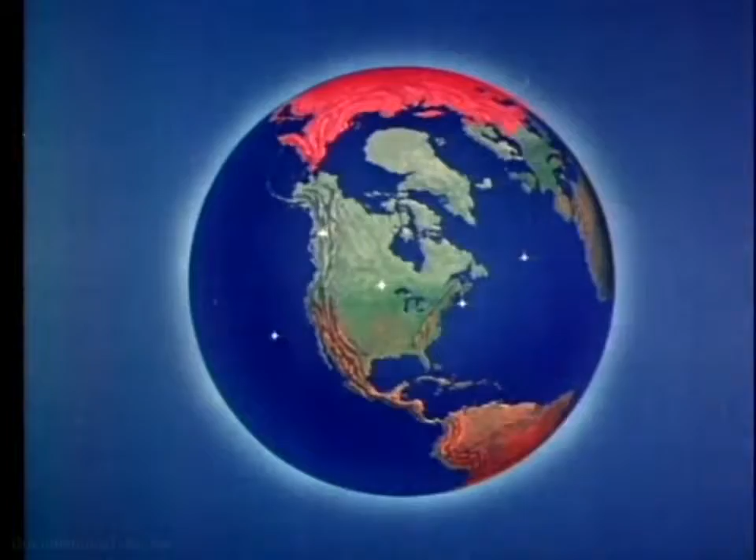Sprawled across North America, from the polar ice cap to the Mexican border, is a giant with 1,000 eyes. Day and night, fair weather or foul, he guards his homeland. This giant is the air defense system of North America, a vast and intricate maze of radar networks. And through the electronic eyes of this giant, we are able to see the enemy before the enemy sees us.

These radars never sleep. Round the clock, they stand ready to do their part in minimizing the penetration of enemy bombers. And round the clock, their quietly pulsing hearts, the magnetrons and the klystrons, help generate the power for peace that keeps America strong.

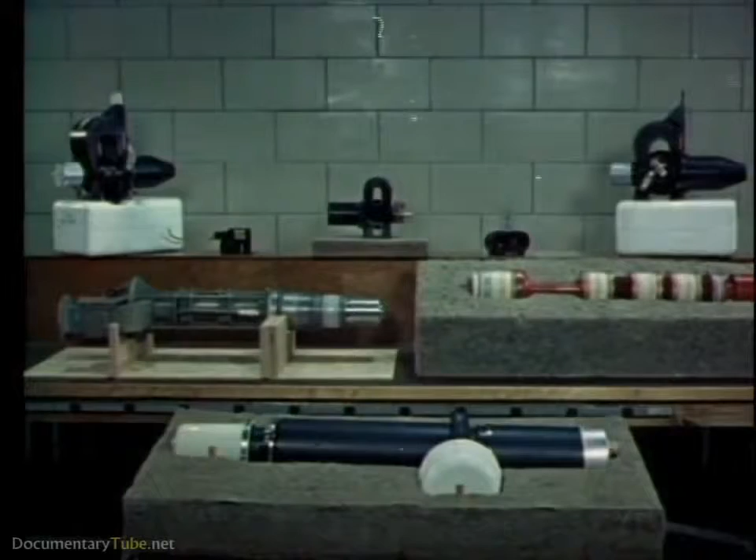These microwave power tubes, the magnetron to generate the radar signal, the klystron amplifier for radio communication, and radar are the subject of our story.

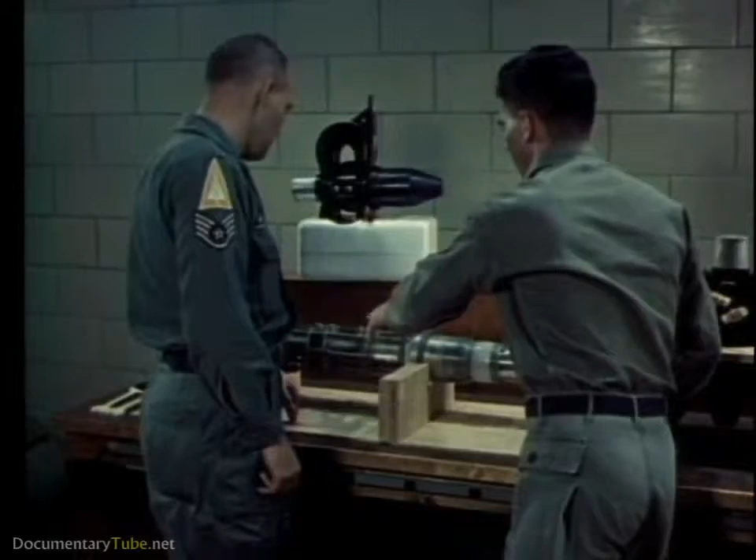It is a story about these vital tubes, but even more about you, the men who work with them. When you have a well-trained maintenance man with a well-adjusted radar at a well-chosen site, then you've really got a winning team.

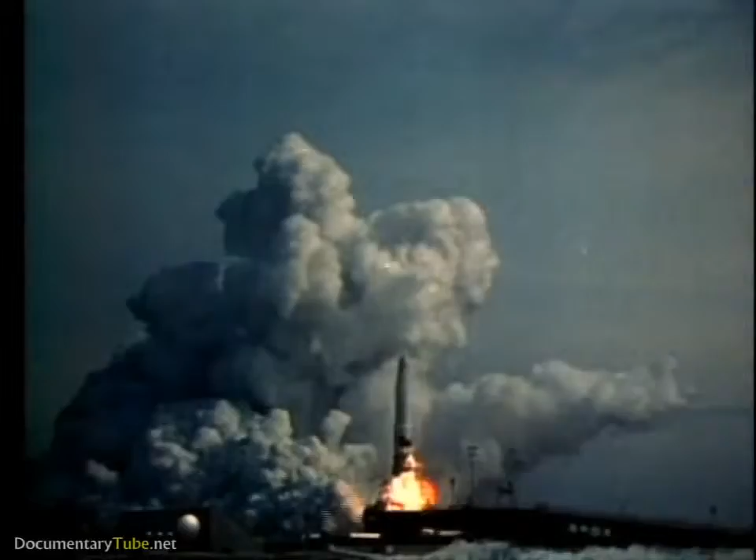They keep the airborne radars operating and ready for crucial missions. In missiles that depend upon radar for guidance. In bombers that depend upon radar for bombing and navigation. In interceptors that depend upon radar for fire control. And in reconnaissance and search aircraft that depend upon radar to extend their vision.

Years of scientific research and millions of dollars worth of equipment have gone into this aircraft. But only if the maintenance men keep the radar functioning can it complete its mission. When something goes wrong, they've got to make a quick decision, whether to attempt repairs in flight or abort the mission.

There's trouble here, that's for sure. But what kind of trouble? First, they check the radar scope presentation. Sometimes this gives a clue. But the most reliable analysis comes from the test equipment on the monitor panel.

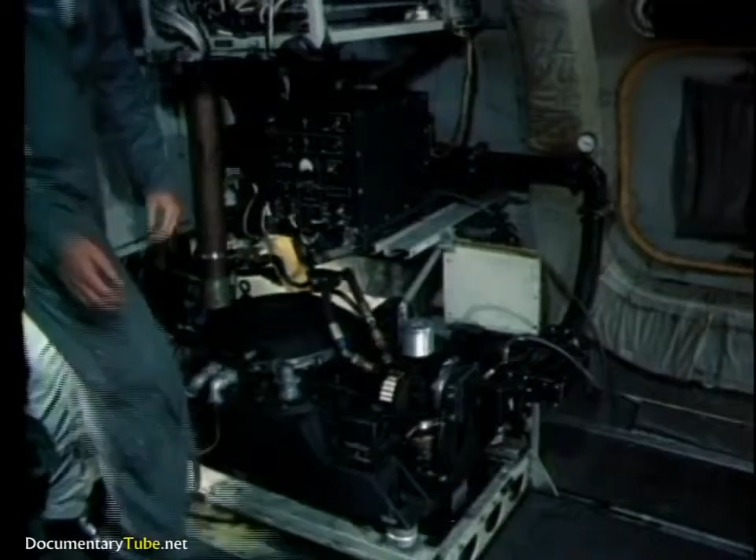The cause might be moisture in the waveguide, corrosion, dents, or scratches. Another trouble spot could be the pressurized antenna system. Loss of waveguide pressure will also cause arcing. Yes, the pressure's low. This is a danger signal. If this arcing continues, the magnetron output window may be damaged, the tube's vacuum lost, and the magnetron destroyed.

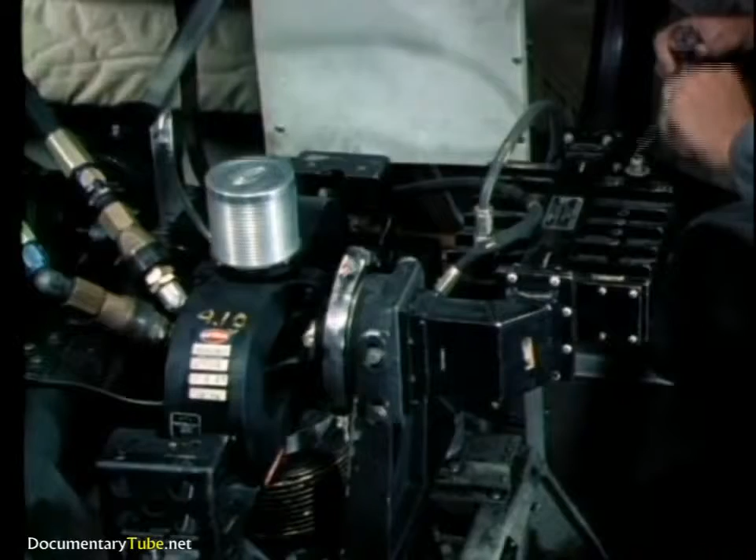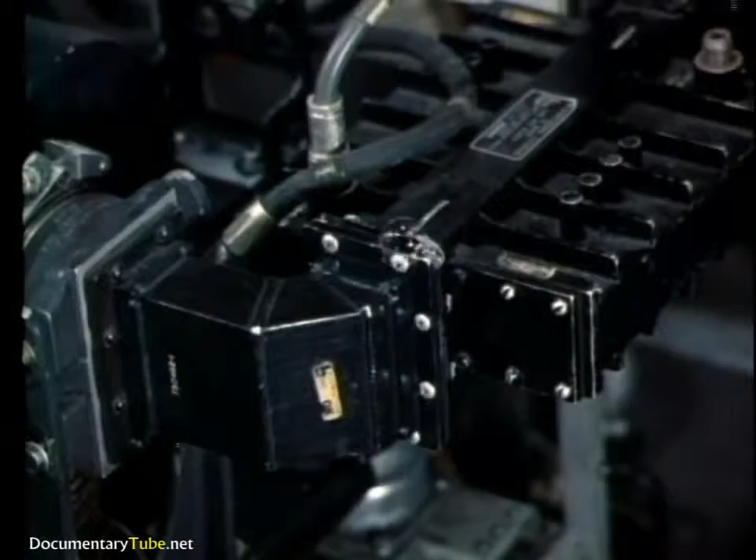Waveguide joints should be tested to make sure they're airtight. This man is making a liquid soap test. See where the bubbles are forming? He's found the trouble. But how serious is it?

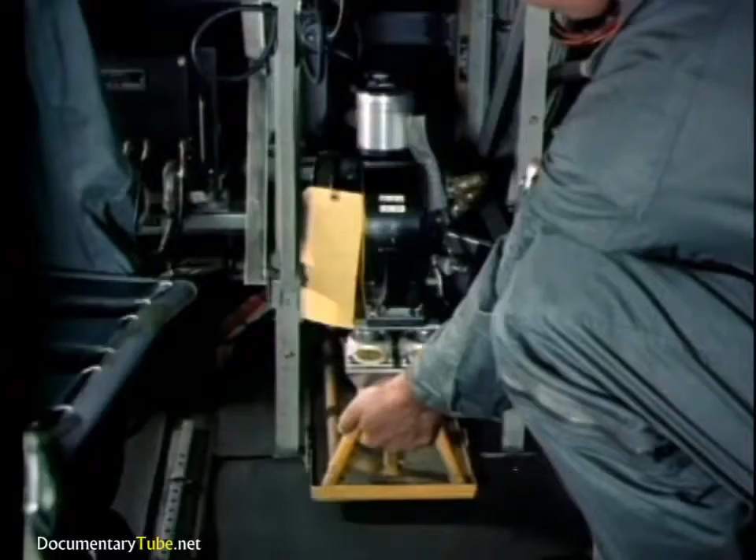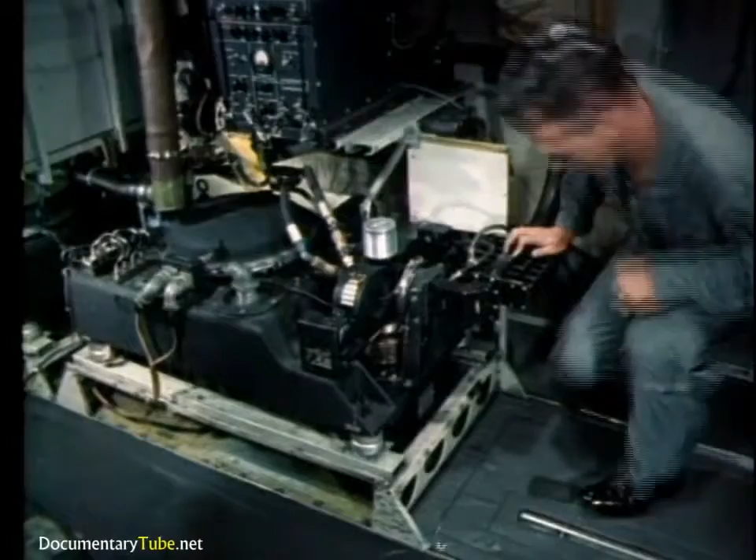While they're working, let's take a look inside the magnetron. Animation shows what caused the malfunction. We'll turn time back a few hours and show the Maggie functioning normally.

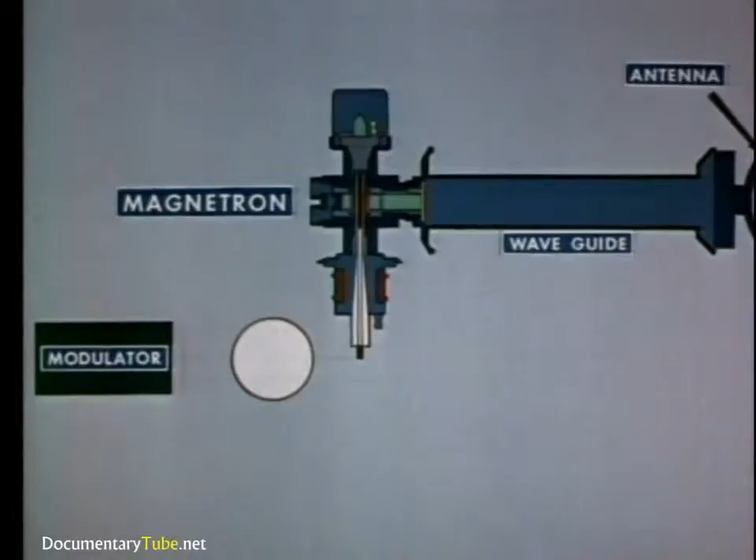As the pulse from the modulator is applied, the Maggie produces radio frequency oscillations to form the radar pulse. This energy is then coupled into the waveguide and directed to the antenna for transmission. Energy is reflected back along the waveguide toward the magnetron.

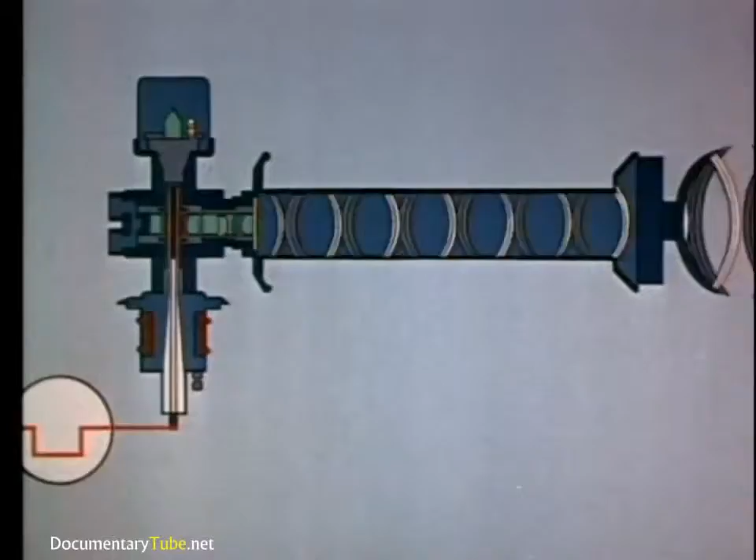Normally, when the antenna system is in good shape, the reflected wave won't be strong enough to cause arcing at critical points. But as conditions such as loss of waveguide pressure develop, the antenna characteristics change and the reflected wave becomes greater.

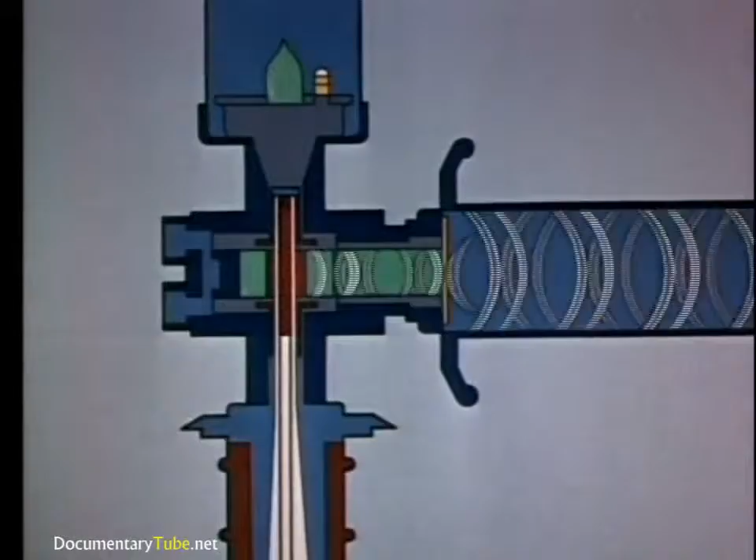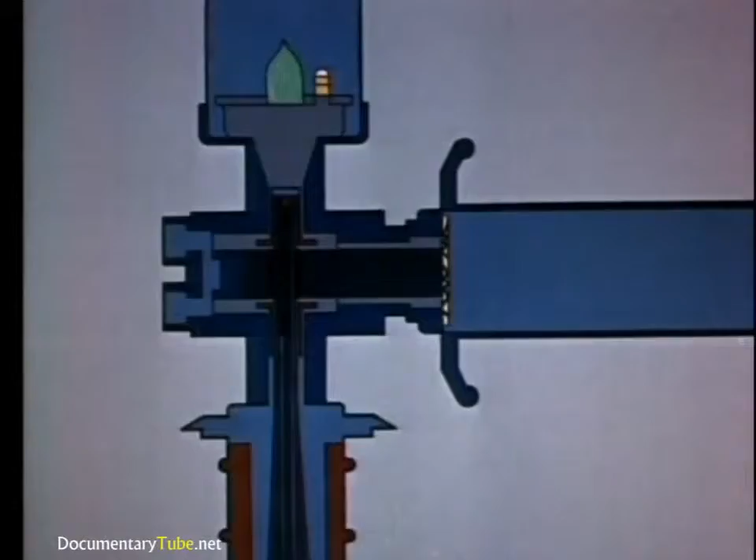Then arcing may take place at the point where the radar wave leaves the magnetron, causing the magnetron output window to crack or puncture. As the vacuum is lost, the heater oxidizes and burns out. The cathode cools. Air seeps into the interaction space, and arcing occurs with each pulse.

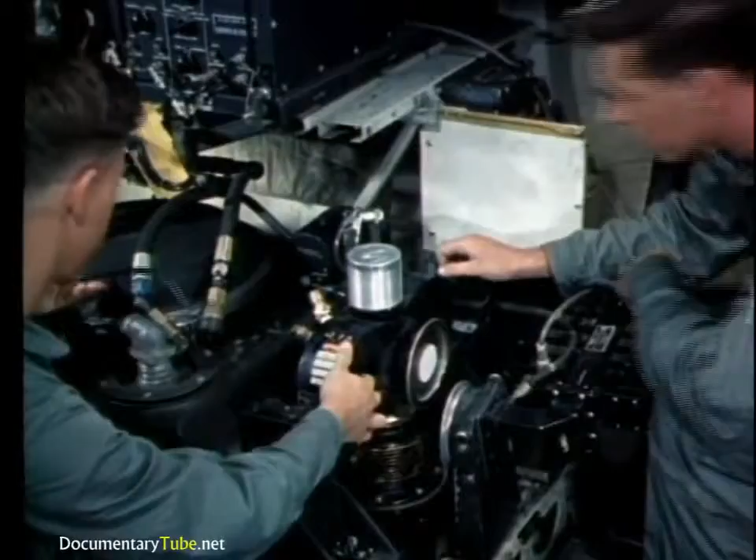After the magnetron has been unbolted, the filament and cathode connections are uncoupled. A large magnetron like this one requires 2 men to handle it safely.

Before a Maggie is replaced, all connections, mating flanges, and sealing surfaces should be inspected. Insulating oil should be examined for foreign matter. Damaged or worn gaskets should be replaced.

Heater's supply voltage should be established at the value marked on the tube. Later, when the plane returns to base, the heater voltage should be double-checked with an accurate instrument.

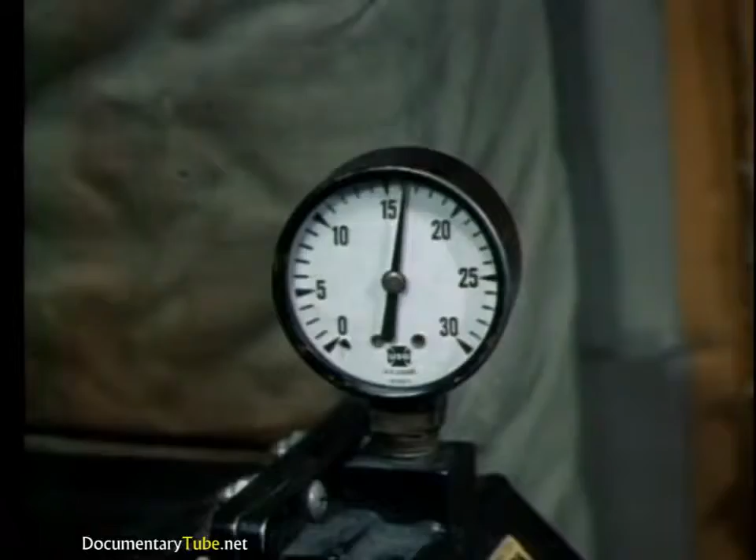Now that the spare magnetron has been installed, further tests are necessary. The technician must make sure he has the required pressure and that there are no air leaks. Instructions concerning the care of pressurized antenna systems will be found in the appropriate tech order handbook.

The liquid soap method is a simple way to check for pressure leaks and may be used where more accurate means of testing are not available. Test equipment is used to analyze the performance of a newly installed tube.

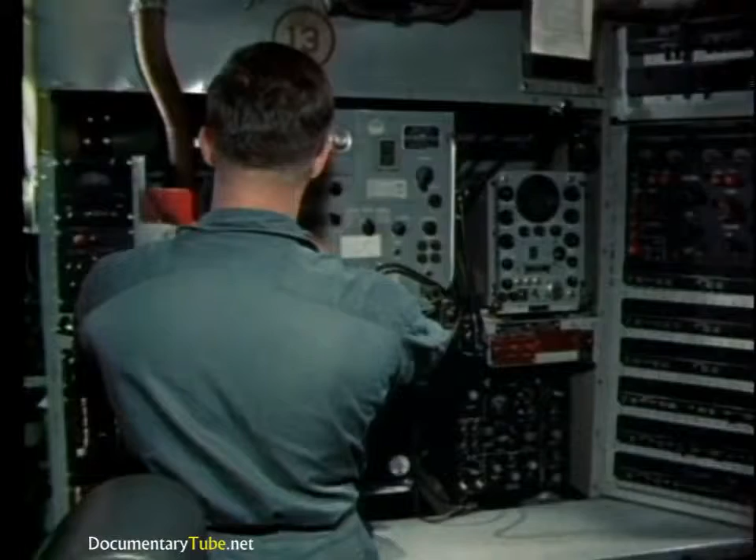The output pulse is checked on the spectrum analyzer. See how the large hump or main bang is symmetrical and sharply defined. The side lobes are relatively small. A presentation like this means that the Maggie is firing properly.

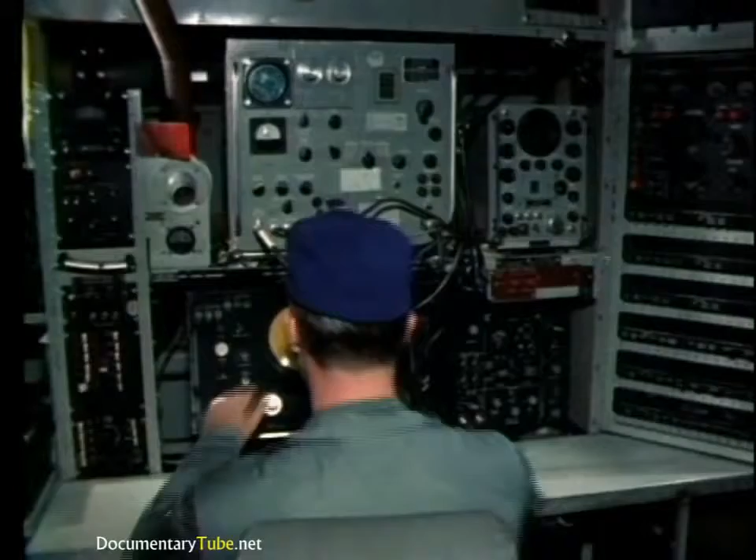Not only that, it means that these technicians know their jobs. They were able to analyze the trouble correctly and replace the magnetron in flight. Because they knew what to do, this aircraft was able to complete its mission.

Let's take a closer look at these microwave power tubes. Magnetrons costing from $100 to $10,000.

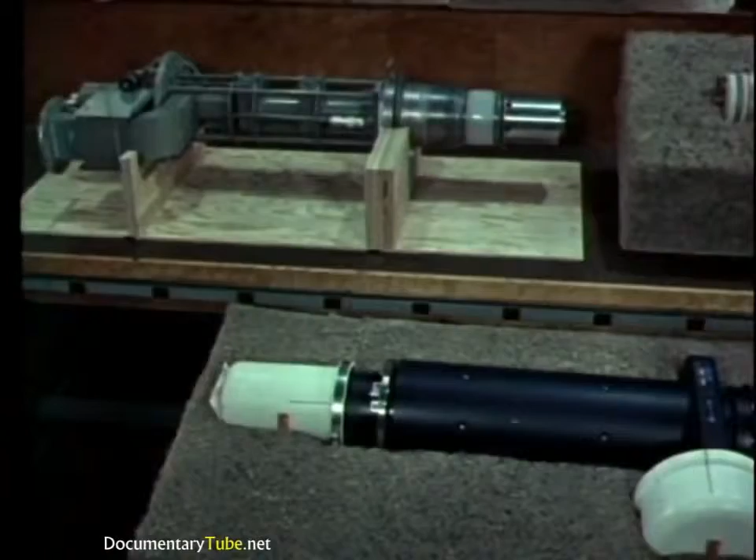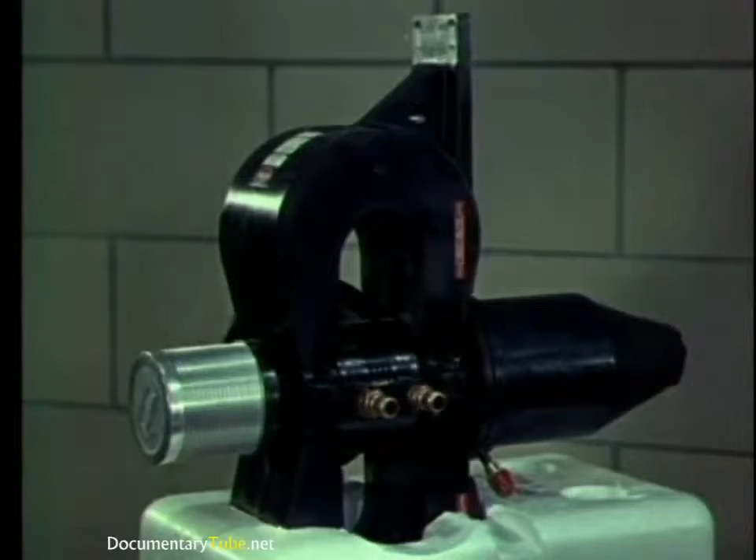Klystrons costing from $1,500 to $25,000. Why so expensive? Let's see what's inside them. Look at this. Parts so critical, they must be inspected through a microscope.

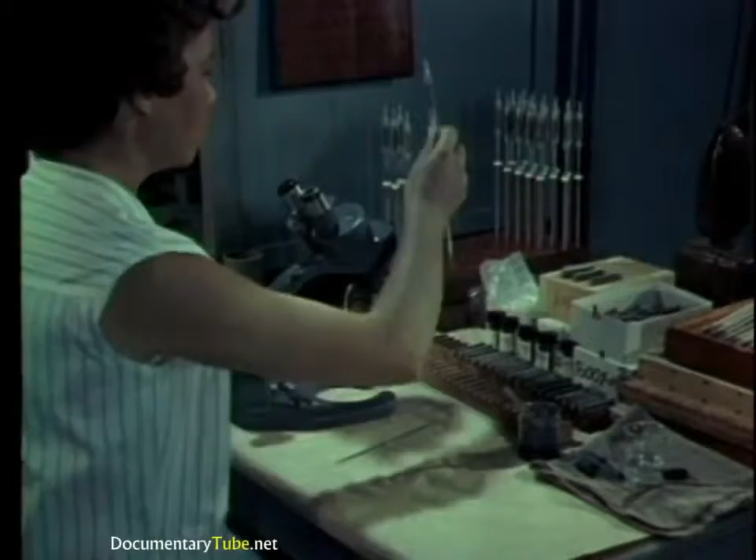Tolerances accurate to 4/1000ths of an inch. To build them to such close tolerances requires involved manufacturing processes. Specialized parts must be carefully assembled.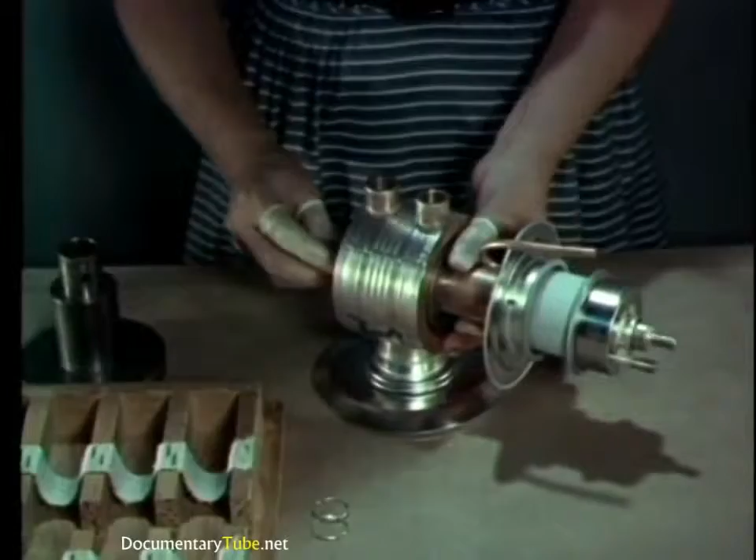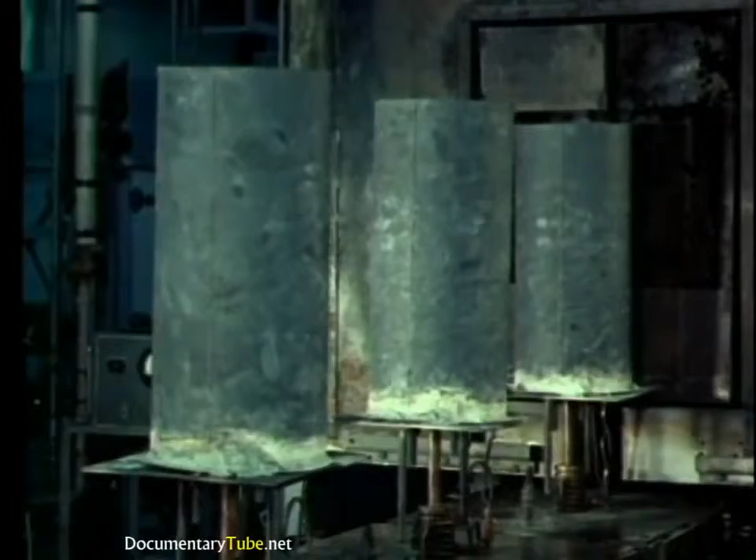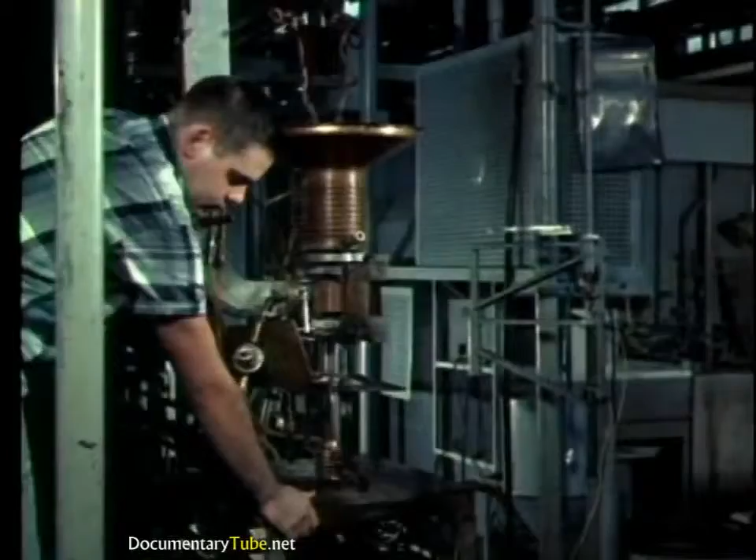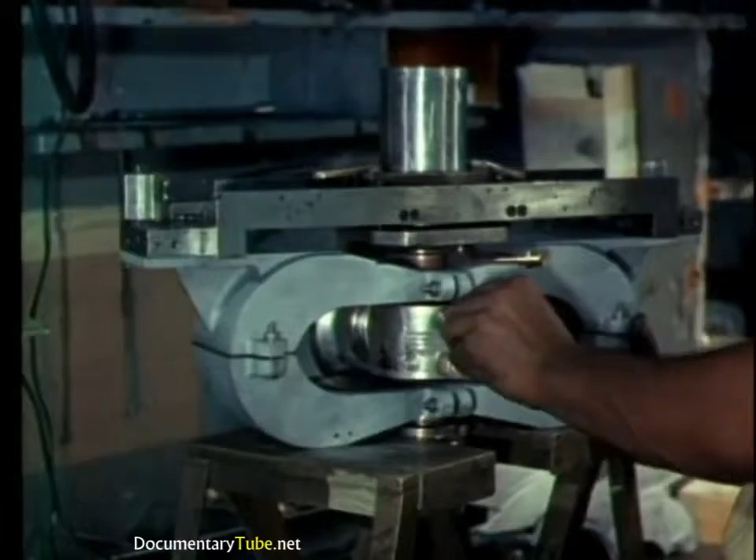The completed assembly is heat treated to bake out gas molecules, so that they may be removed by an evacuation machine. External mechanical parts, such as couplings and magnets, are installed. The final step is rigid testing of electrical performance to make sure it meets the high standards required.

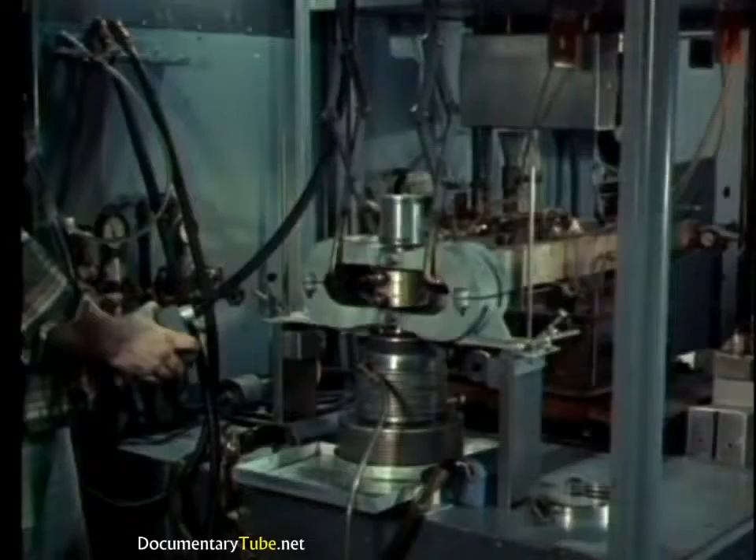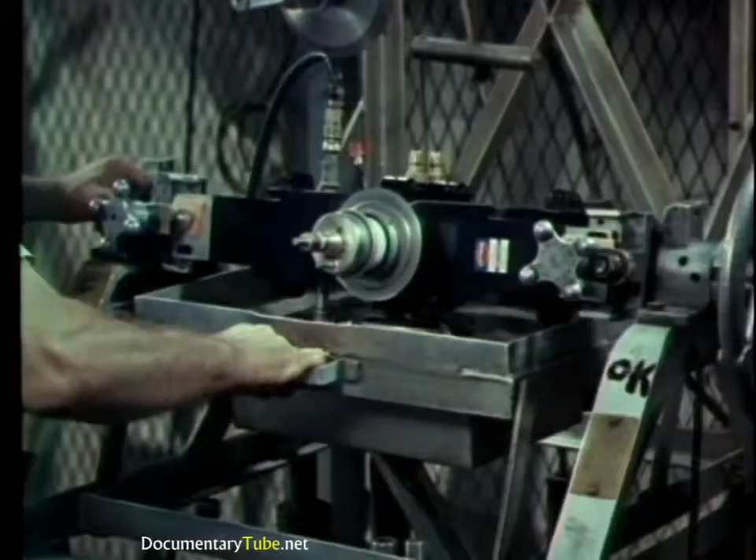Pressure tests ensure leak-proof connections throughout. Now the tubes can be put into storage. Even here, should tiny defects develop while on the shelf, continuous sample testing will reveal them. Before shipment, the delicate tubes are carefully packaged. The quality designed in during research, built in during manufacture, maintained by rigid testing and careful storage, will reach the user intact.

Here are a few basic rules on proper handling. Always use 2 men to lift a heavy tube. A portion of a carton makes a good tube stand, protecting delicate parts from damage.

But a wooden rack is better and lasts longer. Save all the cartons and packaging materials. Use them to return defective tubes to the factory.

Magnetrons should be separated at least 12 inches. Then their magnetic fields won't interact. Don't store them on steel shelves or they may be degaussed.

Don't use steel tools. Use non-magnetic tools. Following these simple rules will save time and trouble, prevent damage, and save the Air Force many thousands of dollars each year.

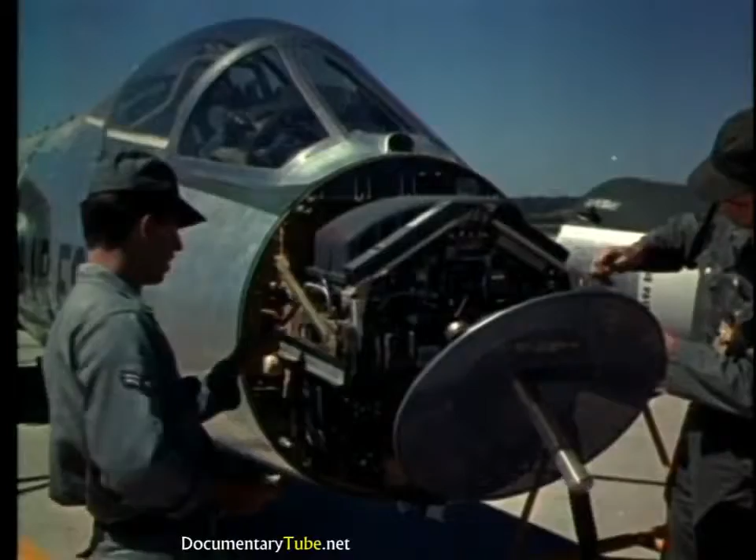On most of the smaller high-performance aircraft like this one, it is not possible to do in-flight radar maintenance. Therefore, most of the work must be done in the electronics maintenance shop. This aircraft has just aborted an intercept training mission. The reason: radar malfunction. Had this mission been the real thing, an enemy bomber could have broken through our defenses.

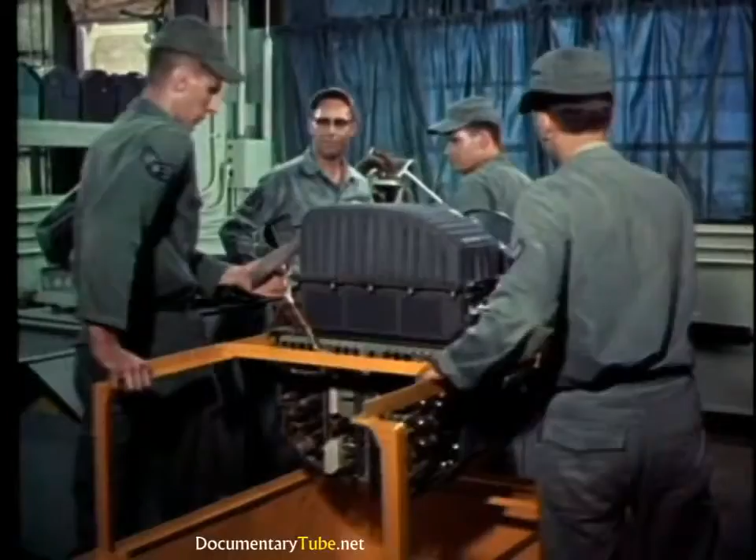The maintenance man's job is to find out why the radar malfunctioned and correct the trouble. You'll see that although these radars come in smaller packages than those on larger aircraft, they are just as big a maintenance problem. The maintenance supervisor is in charge of this work.

Before teardown of a defective black box is started, the operational defect should be identified or at least isolated to a particular subchassis. The pilot's report on the radar failure may give a clue. Comparing the report of malfunction with equipment handbooks may also help to isolate the defect. But the best aids to repair are the analytical approach of the technician and the special test equipment he uses.

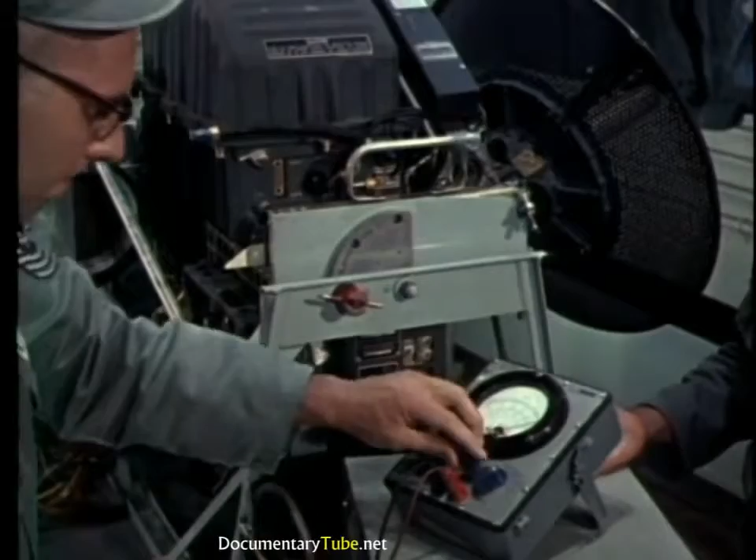An important point to remember is that the transmitter malfunction may be caused by parts other than the magnetron. Wherever possible, other circuit components should be checked before power is applied. A simple resistance check will often reveal a short circuit.

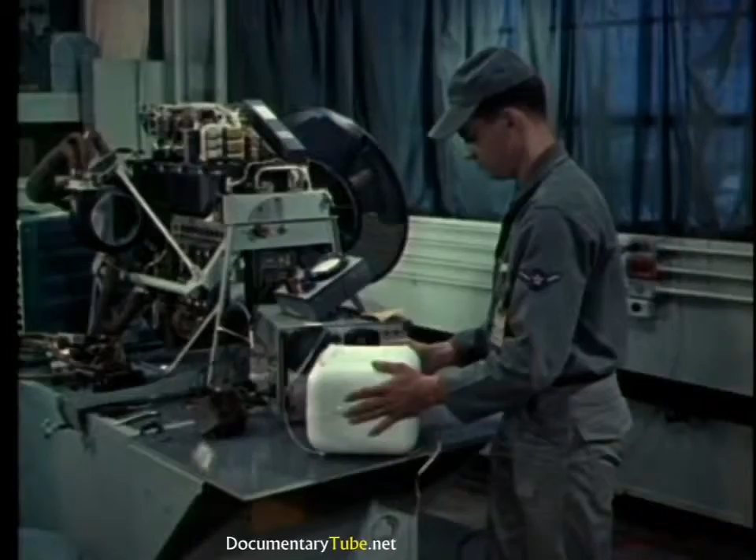That's what the trouble is here. The airman will carry on from here and trace the short circuit. So far, so good. He's found a shorted filament transformer and replaced it with a new one. But what's this? He's decided to change the magnetron, too.

The supervisor disagrees. Tube swapping is not a good idea. The old magnetron should be thoroughly tested before any decision is made. Testing showed that the old magnetron should be replaced. This has been done. Now let's see how the new Maggie behaves.

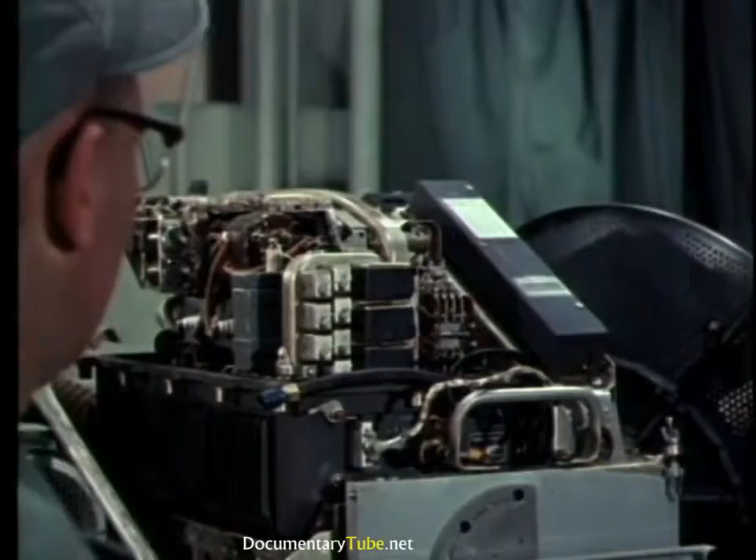This is confusing. The spectrum analyzer shows arcing. Let's look inside the tube and see what's causing it.

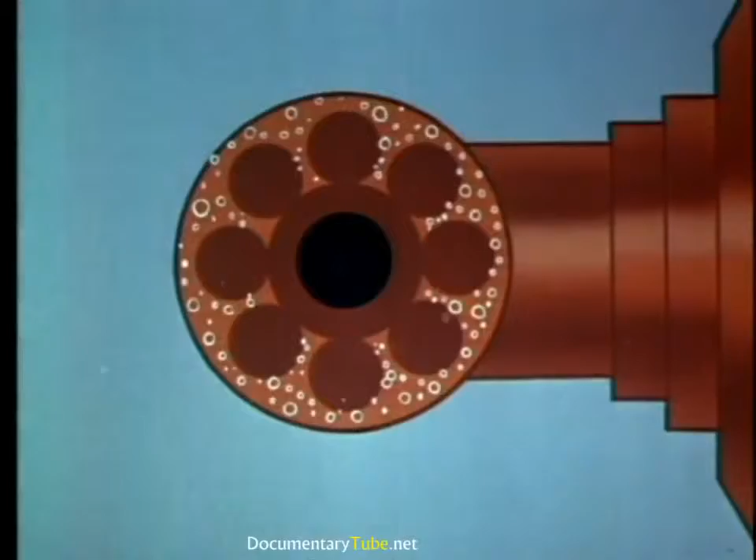Magnetrons are made of porous metals, which usually trap a small amount of residual gas. During storage, gas molecules migrate into the interaction space surrounding the cathode. When the tube is installed and power applied, it will operate normally if the gas content is low. But if gas content is high, arcing will occur with each modulator pulse.

This arcing might be mild or severe. Frequently, tubes with residual gas can be restored to normal operation by a suitable break-in or seasoning period. During break-in, the gas molecules are driven back into the walls of the tube, and normal operation resumes. If the equipment is operated frequently, normal operation should continue throughout the life of the tube.

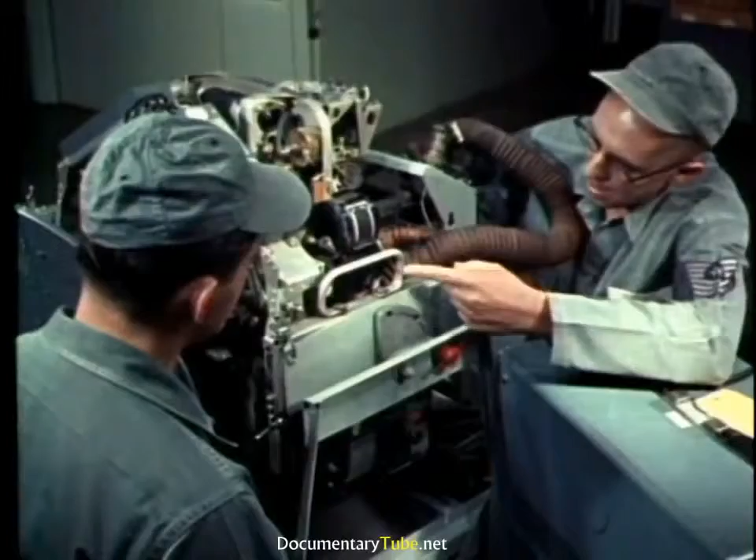Occasional individual arcs may also be noted in a normal tube which does not contain gas, but this behavior is due to transient conditions and should be considered as normal. All new tubes which display arcing when they are first installed should be thoroughly tested and analyzed before being discarded. This will save the government both time and money.

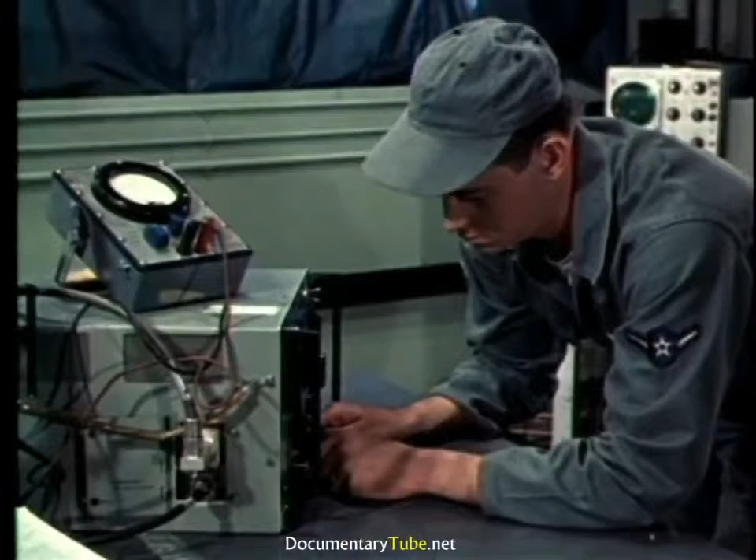The repairs are finished. Now comes the break-in procedure. Proper break-in can clear up various degrees of internal arcing. But watch the spectrum analyzer carefully. If frequent arcs occur, switch to standby immediately.

Small magnetrons may be damaged if severe arcing is allowed to continue more than 2 seconds. Now the range selector switch must be changed to short pulse before the magnetron is operated.

If only sporadic arcing occurs, operation may be continued. But a series of arcs may cause the overload to pop. In this case, reset the switch and continue the break-in.

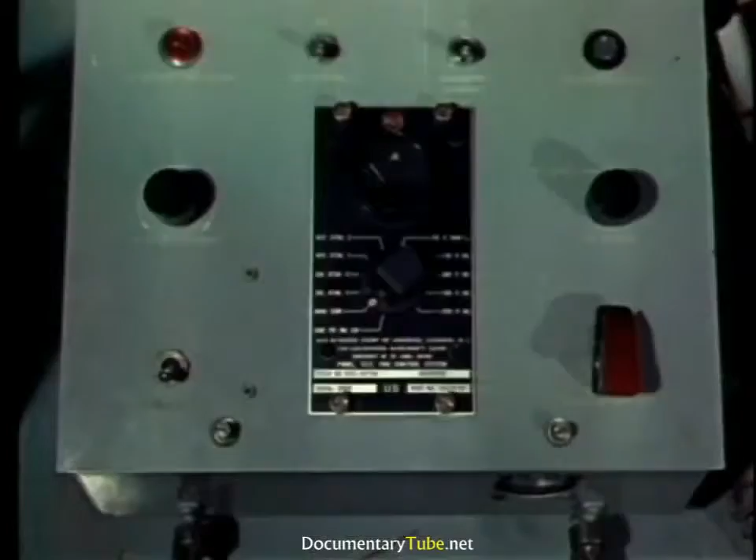To avoid possible damage during the break-in, the technician should keep a close watch on modulator tubes and other components of the RT unit. The time required for break-in will vary with the tube, conditions, and methods used, but normally break-in can be accomplished in 20 to 60 minutes. When break-in is complete, and only infrequent arcs or misfirings occur, operation may be regarded as normal, and the equipment made ready for service.

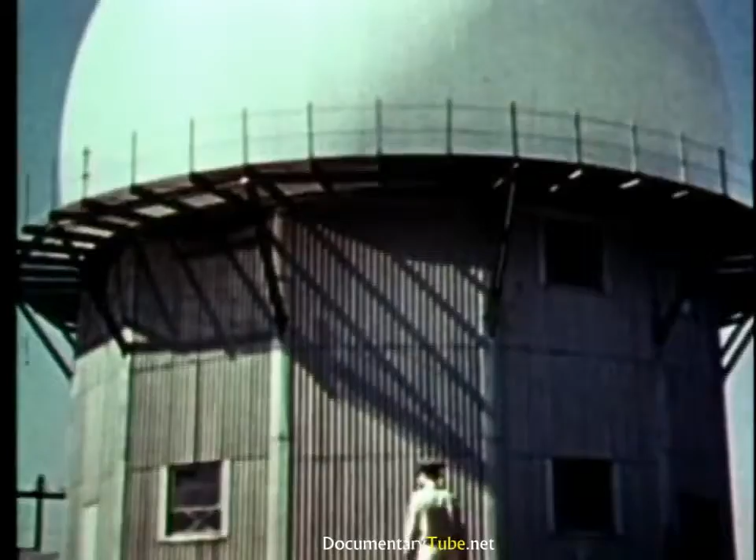In addition to the airborne radars, there are a great many ground radar sites scattered about the continental United States and Canada. They are found in almost every type of American scene: in the dusty expanse of the plains, in the Northwoods, the heat and humidity of the deep South, in the rolling farmlands of the Midwest, and the salt water scenes of our coastal areas.

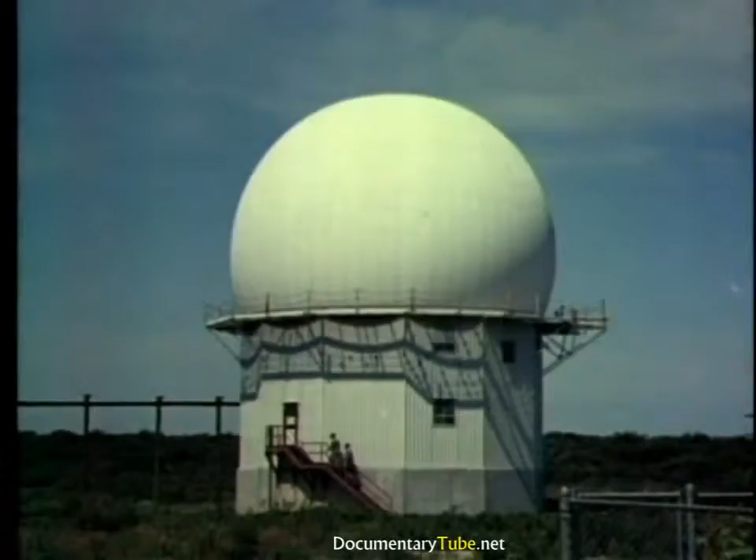Each of these has its own problems of maintaining and efficiently operating its microwave power tubes on a round-the-clock basis. Some of this equipment is completely automatic, but experienced technicians are always nearby, just in case. At the many radar sites where there is no standby equipment, the maintenance man is an even more vital unit in the organization.

In the operations room, observers keep constant watch on the radar scopes. Here's trouble developing.

When equipment starts to malfunction, quick repair is a must. These men are so used to the sound of the equipment, they can tell by listening whether the magnetron is operating or not. It's not.

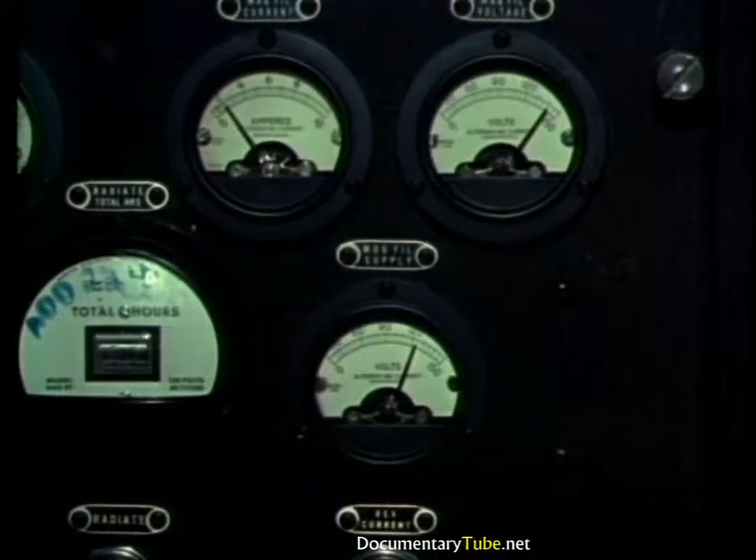Something caused this radar to quit. What was it? Sometimes the meters will tell the story. The filament current has dropped to 0, and the filament voltage is too high, indicating that a portion of the heater element is open. A quick, careful analysis has to be made.

Here is where maintenance skill and training pay off. The question is, has the magnetron become inoperative because of heater failure? Or is there another cause?

Yes, here's something. The insulator is pitted. High-powered magnetrons like this one have insulator bushings immersed in oil. It might be that the insulating oil has broken down. Better check this.

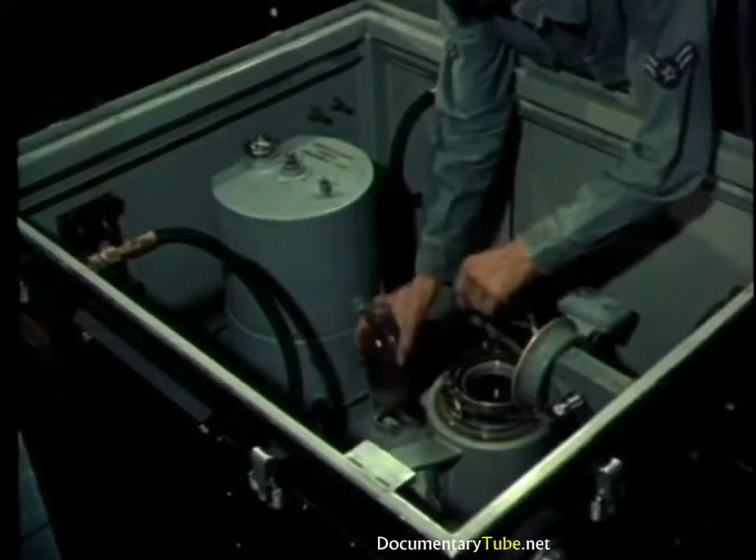Here's the answer. Contaminated oil. The oil failed to insulate. Oil can break down after long exposure to heat and high voltage. Oil may also be contaminated by dust, moisture, metal particles, or air bubbles.

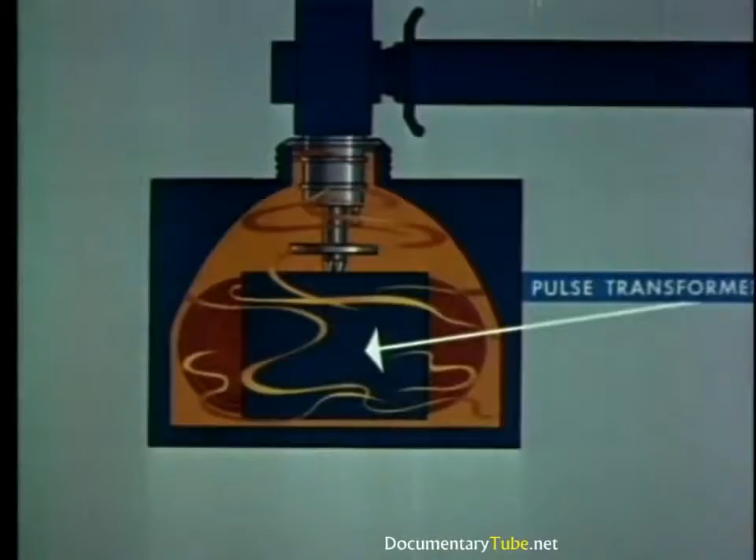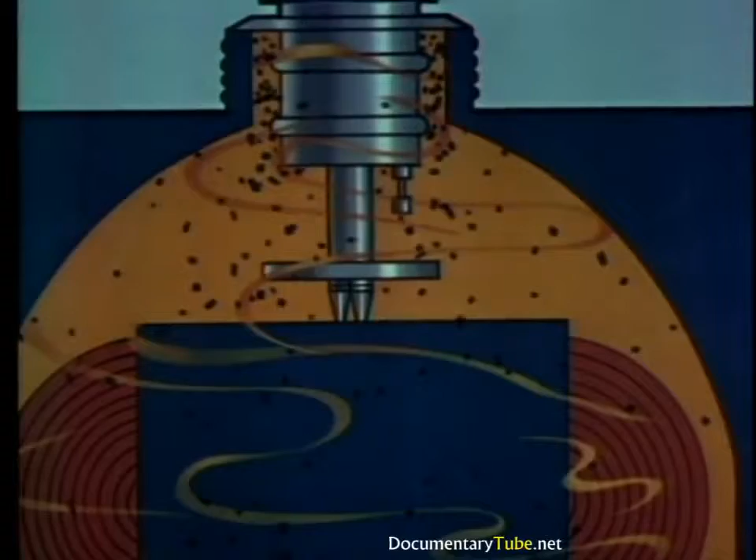Here is how contamination breaks down oil. As contamination accumulates in the oil, current paths are created between high voltage terminals and ground. As the condition becomes worse due to increase of contamination and change in oil structure, a definite high voltage path for corona discharge is created in the oil.

The corona discharge begins to erode the surfaces of the insulator. As the insulators are penetrated, the vacuum in the tube is destroyed, and the tube is damaged beyond recovery.

The maintenance men have completed oil replacement, using all precautions to prevent contamination. They have checked the grade of oil against tech orders and factory instructions.

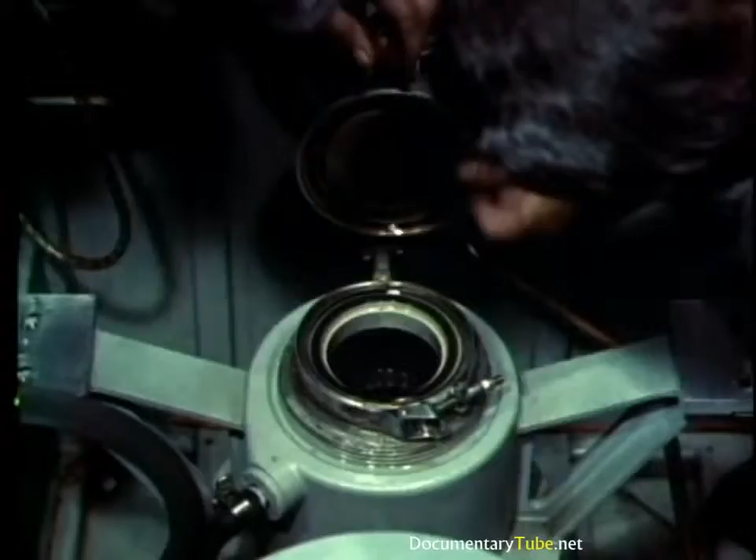But before installing the new Maggie, all mating surfaces and flanges must be inspected and cleaned or replaced as required. It is also necessary to check waveguide parts, replace gaskets, coolant hoses, oil fittings, and so forth.

Be sure all electrical connections are secure. Careful, watch out that terminal doesn't hit the cabinet. That could ruin the tube.

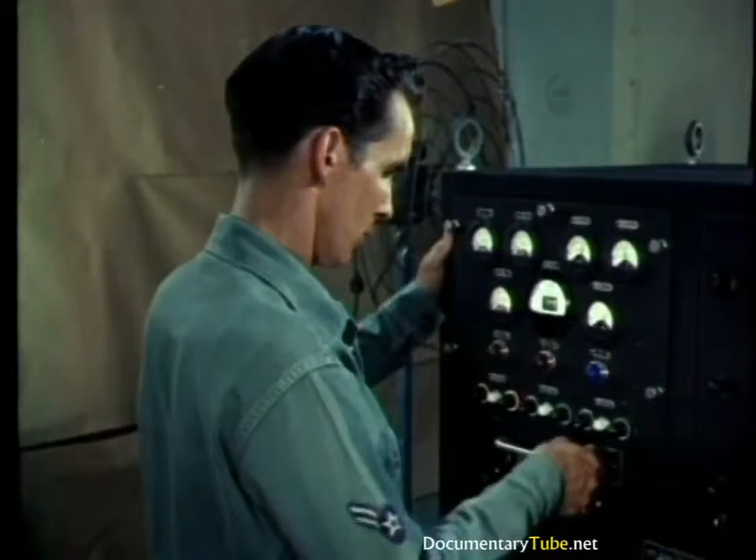Make certain that all clamps, bolts, coolant hoses, and so forth are secure before operating the tube. All set? Okay, hit the power button. Uh-oh, that one didn't last long.

There are many reasons why new tubes may fail to function properly. One of the primary causes of tube failure is damage sustained during transportation and handling. This damage may occur during shipping or in the depot, or during Air Force distribution to the base.

Here is what actually happened to that new tube which failed to operate. Nobody saw it happen.

Nobody's going to tell, and nobody's going to get the slightest use out of that magnetron. But these men don't know this Maggie fell off a truck. They just know it won't work.

Could it be something wrong with the rest of the equipment? A short circuit? A bad connection? Or should they pull out this Maggie and install another?

They've installed another new Maggie. They've also followed correct procedure, allowing the heater to warm up 5 minutes before applying power to the anode. Ah, it works.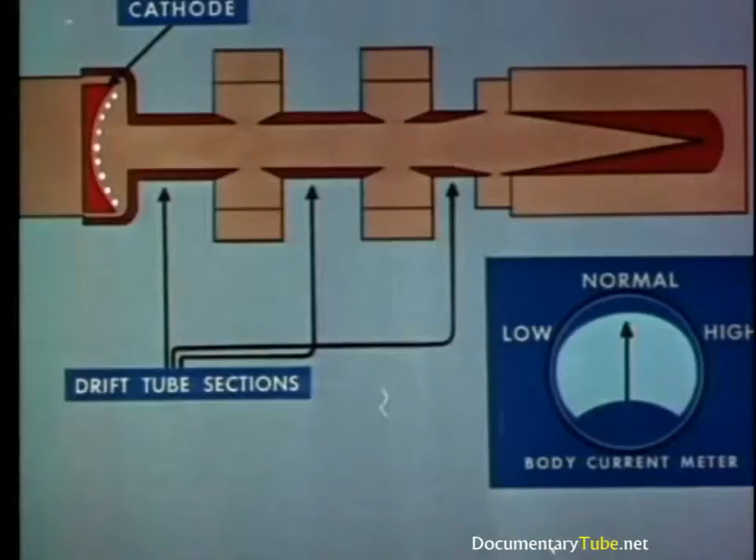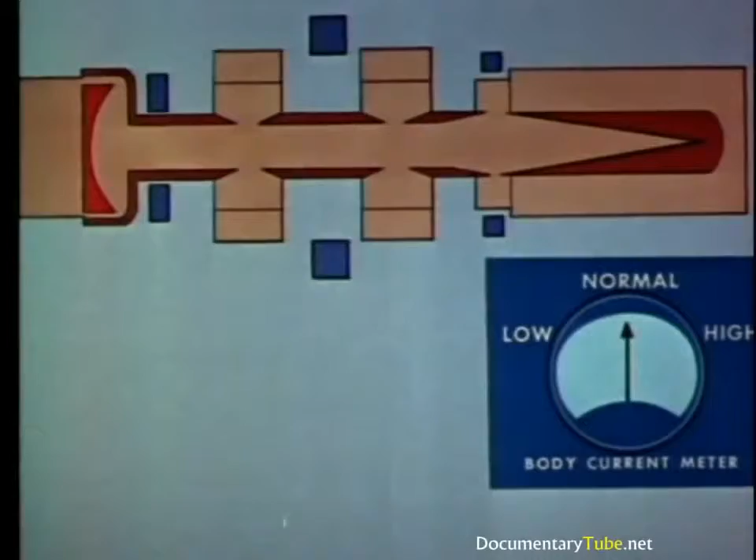Let's look inside a typical two-cavity power klystron and see how it operates. The beam current is emitted by a heated cathode and passes through the drift tube sections. Since electrons in the beam have like charges, they repel each other and tend to diverge, to be absorbed by the walls of the drift tube sections. But electromagnetic coils placed along the tube align them into straight paths. However, misalignment of the focus coils can seriously damage the drift tube tips. Therefore, it is most important to adjust the magnetic coil currents properly during installation of the tube.

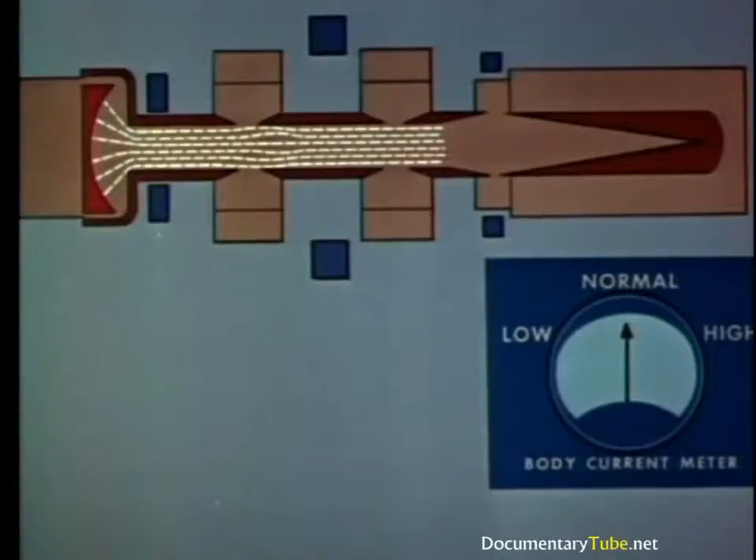When a steady, direct current is flowing through the tube, an RF signal from the RF driver stage is introduced into the first cavity resonator. As the cavity is tuned to resonance, a strong RF field appears between the drift tube tips, which form a gap in the resonator. The electrical charges on these tips alternate at the driver frequency rate on opposite sides of the gap.

At the same time, individual electrons in the beam are being accelerated or decelerated at the RF frequency rate. This produces bunching of the electrons as they approach the gap in the second resonator. There they are decelerated and release energy. The resonator converts this energy to RF energy and amplifies it. Additional resonators are sometimes provided for greater amplification. From the last resonator, the amplified RF signal is coupled into the waveguide and transmitted to the antenna.

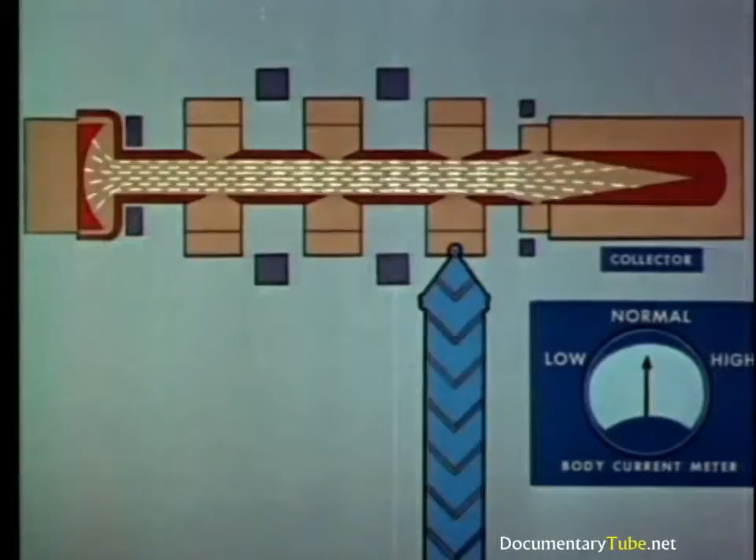Various kinds of klystrons are being phased into new Air Force applications, such as these tropospheric scatter communications transmitters. In this way, intelligence may be relayed from remote early warning sites to control centers many hundreds of miles away.

This transmitter has dual equipment. One transmitter operates while the other is on standby in case of emergency. The equipment is automatic. Meters and instruments keep a constant check on its operation, and a warning light flashes in case of trouble.

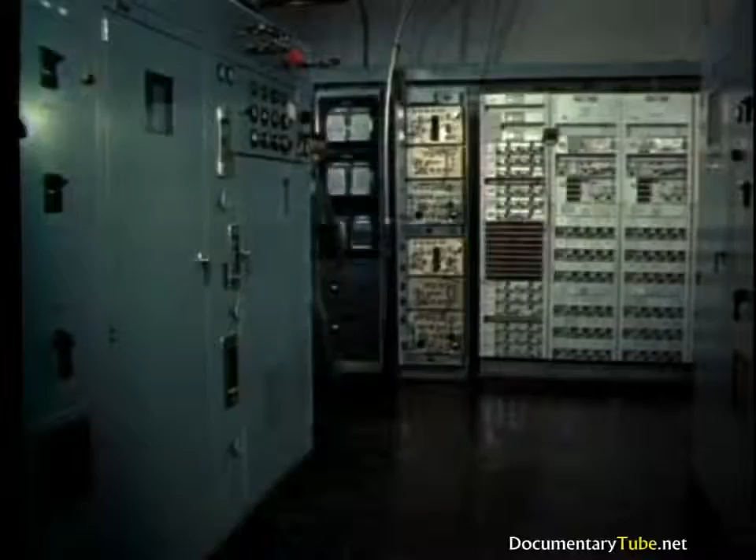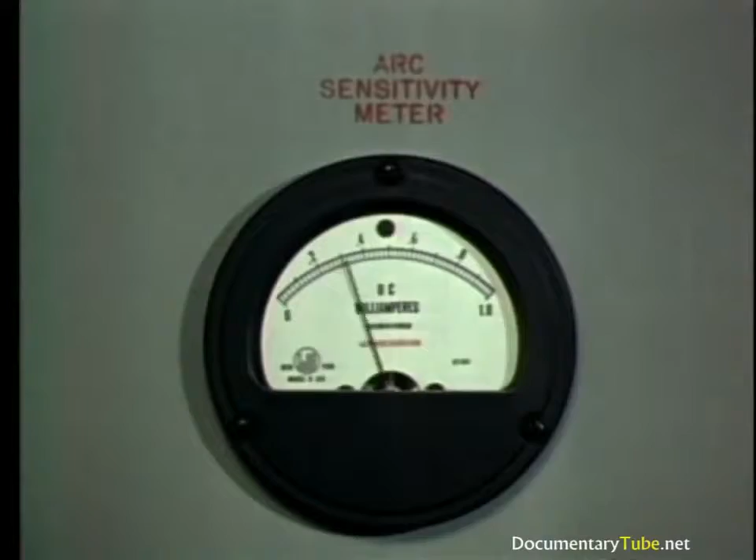And speaking of trouble, a glance at the meters tells them the trouble is in the transmitter output. The equipment is reoperated. Readjustment of the output cavity and coupler may correct the trouble, but the arcing continues. Since adjustment won't correct the trouble, all they can do is shut down the transmitter for repair and switch over to standby.

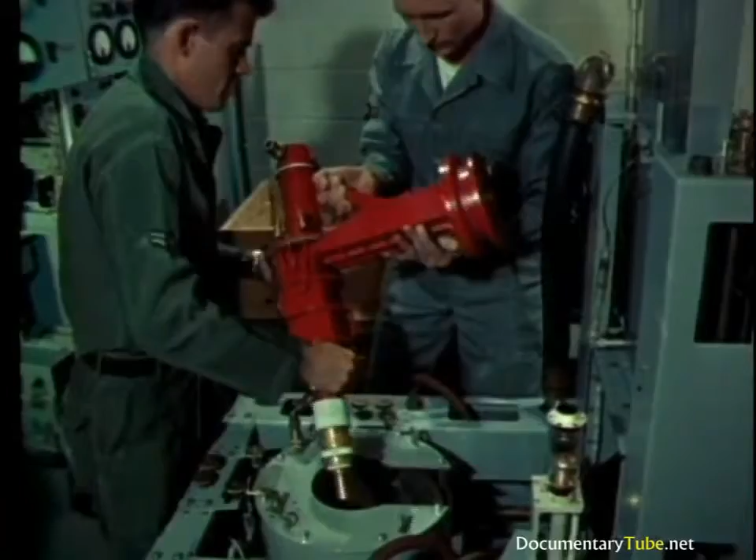The klystron has been removed for inspection. It may have been damaged by the arcing. Yes, the output ceramic is badly damaged.

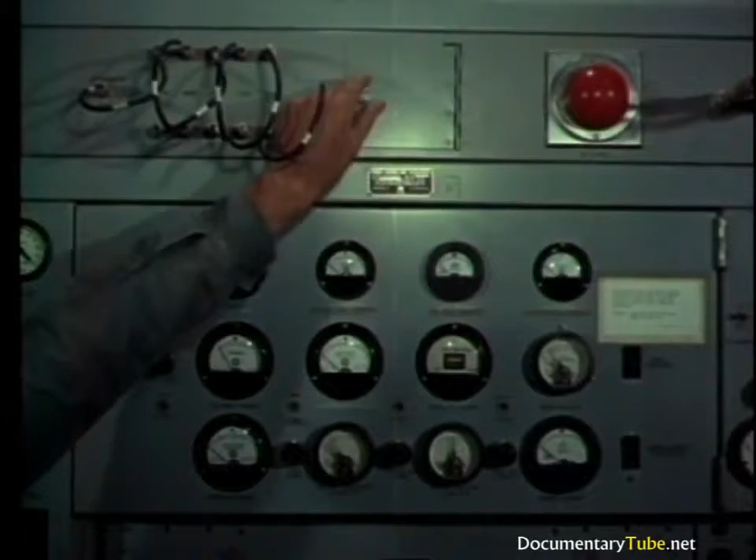An important consideration in maintaining the klystron is the proper adjustment of the impedance matching unit. In this case, improper adjustment of this unit during installation ultimately caused the arcing in the output section, which in turn destroyed the tube.

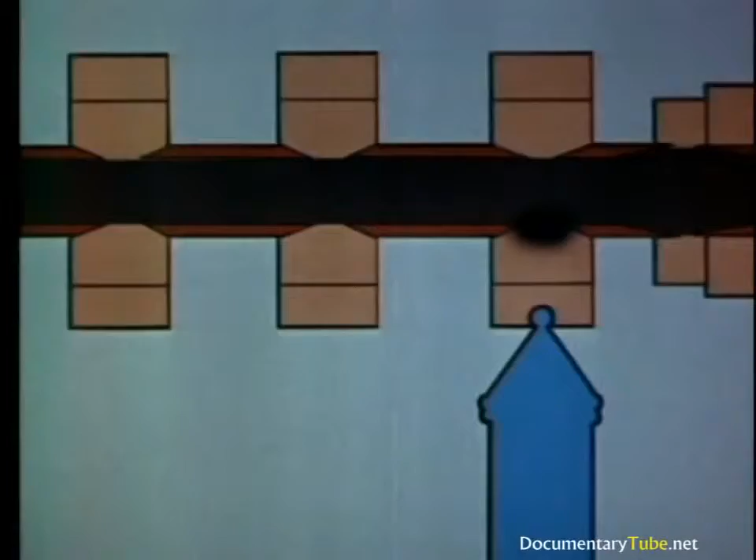There are two types of meters which help maintain proper coupling: the power output meter and the VSWR, or voltage standing wave ratio meter. These measuring devices should periodically be checked for accuracy. But in general, the best way to avoid damaging or destroying the klystron is to study and thoroughly understand the various installation and operating instructions furnished by the equipment and tube manufacturers. Only by doing this can Air Force technicians and maintenance men hope to get the full operating life from their klystrons.

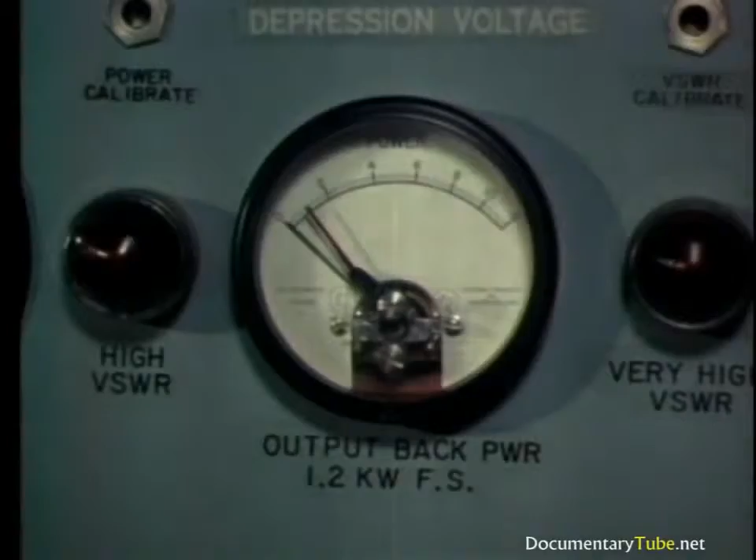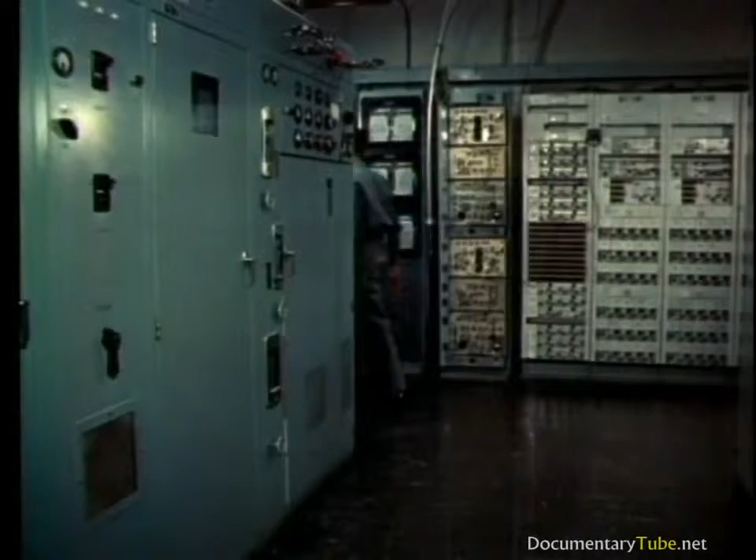At the Tropo Shack, the maintenance men have installed the new klystron. But before operating at full power, they are careful to recheck all circuit meter readings and coolant flow gauges. These meters are important because a minor error in one of the adjustments might shorten the life of the tube. The power klystron is really a very dependable piece of equipment if properly treated. Once it has been correctly installed and aligned, it requires very little maintenance during its long service life. A good rule to follow is: install it carefully, align it properly, then leave it alone.

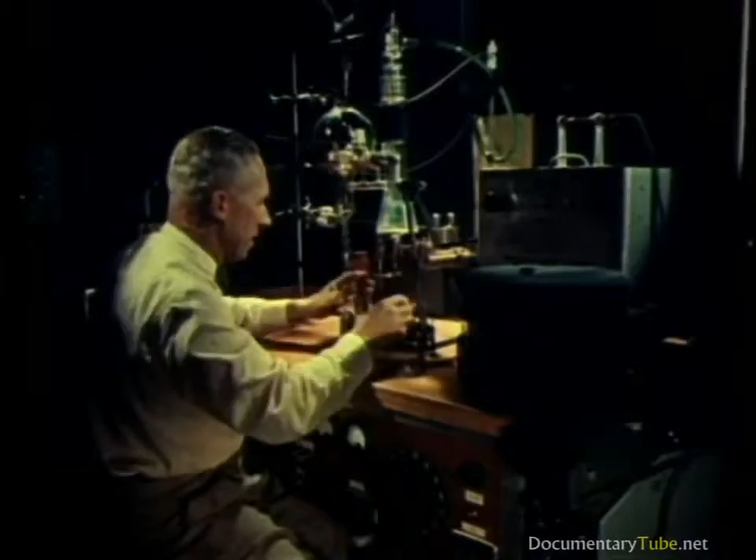As the progress of aircraft and air defense continues, other and more varied uses will undoubtedly be found for microwave power tubes. With these new applications will come new problems to be solved by maintenance men of the future. Those men will tread the paths charted by technicians of today, who found that this type of maintenance can be simplified by careful attention to four basic factors: careful handling, proper break-in, avoidance of tube swapping and trial and error maintenance, and the timely use of maintenance aids such as test equipment, tech order handbooks, and manufacturer's information pamphlets. There is no substitute for know-how, initiative, and ingenuity.

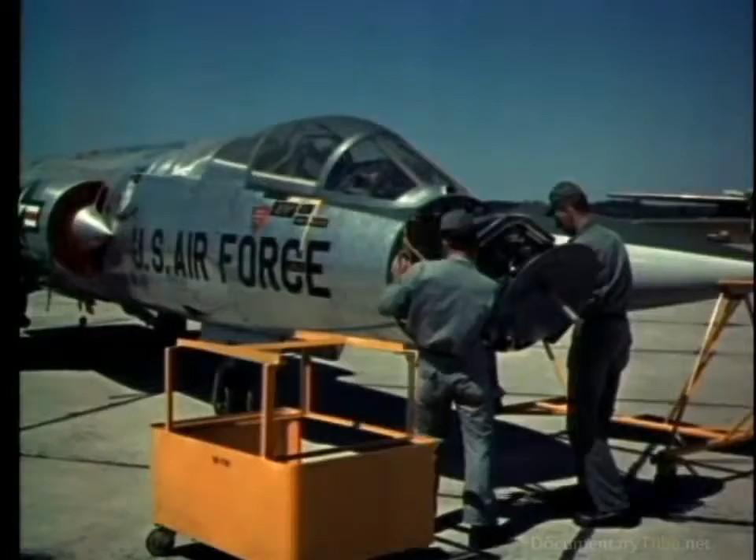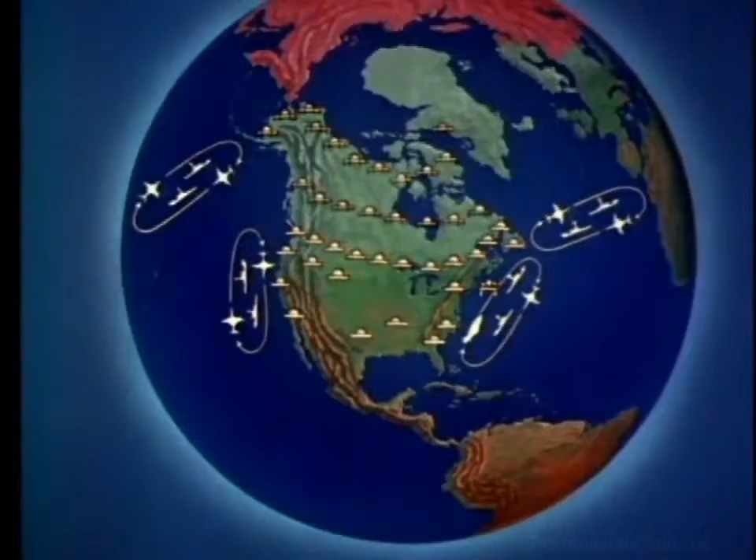Yet no one man or group of men can do this job alone. Maintenance is a team effort. Only by the cooperation of procurement, supply, transportation, and every department concerned can the Air Force continue to operate the reliable radar equipment which is such a vital part of national defense. Only by continued teamwork and devotion to duty can the radar eyes of America guide us to that peaceful tomorrow, which is the reward of nations who stay alert today and every day.